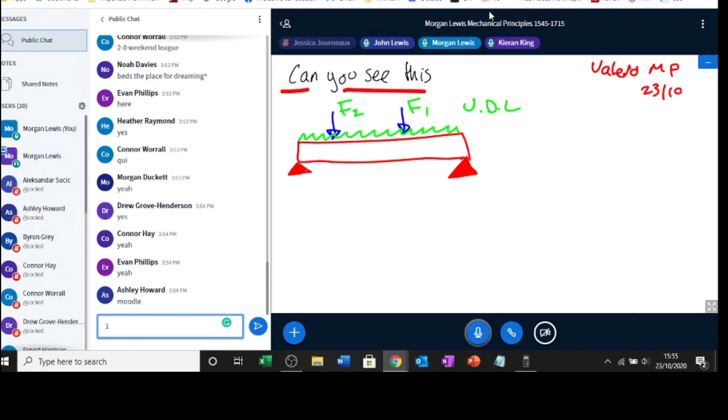Right, in your assignment you should be okay now with doing a beam with forces and UDLs. Does everybody agree with each other? Is everybody happy with the beams? Let me know if you're happy with beams.

Look what colour that is. Look at that lovely colour.

All happy, okay, well done. Heather's happy, anybody else happy with the beams? Because I'm going to move on now, just in case I don't have you next week. But I won't spread that rumour.

Right then, well, I need a pen and paper today. No, you're a volunteer, you volunteered to be here, it's up to you.

Yeah, I would say so. Yes, I would. Obviously I'm recording this video, John, because I worked out how to do it properly now, because I got a few videos where there's no sound. And I'll screenshot as I go along, so I'll make this stuff here now.

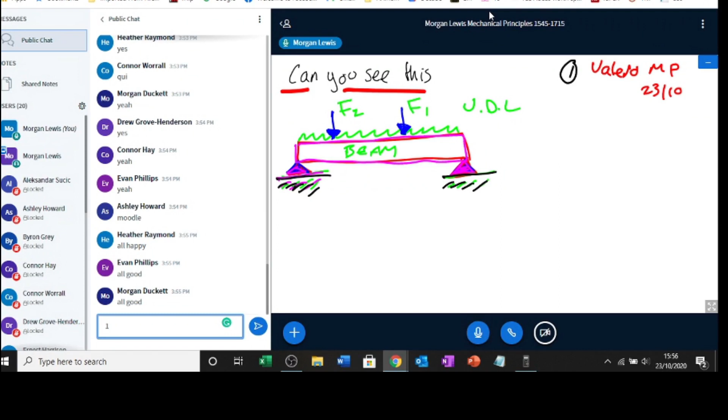But yeah, I would, John. Right, so okay with beams then. Okay with beams. New subject then - no, it's not new to us because we've done a bit in materials already.

If you've got a bit of metal or a bit of plastic or whatever, right, whatever this is, we know it's got an area, right. So this is very similar to mechanical materials - that's my area, that little rectangle. If I now apply a force this way, there's my force.

Right, going that way, what type of force is that called? It begins with T. Tensile, it's in tension, and all that means is being pulled apart. So tensile just means it's in tension, it's being stretched, say, that's all it means. This metal bar, or whatever it is, has been pulled apart, so it's in tension.

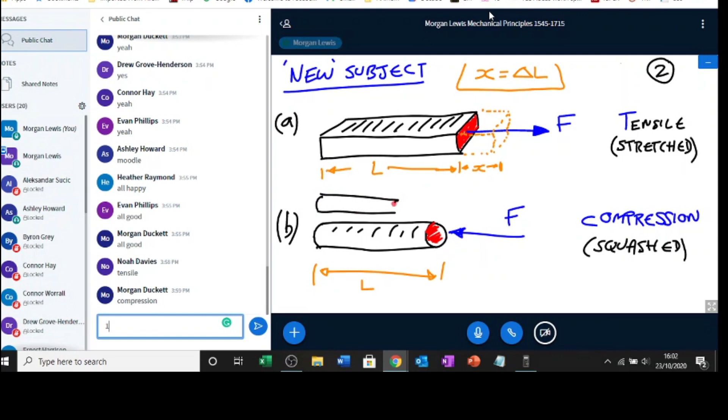Obviously this one with the compression is going to go the other way. So it's getting shorter, it's being squashed. It's like a can crusher, going from that to that, say. So this is my change in length, delta L. I'm just squashing it. Squashing it. One's going one way, compression's going the other.

So a lot of rugby players, they have compression in the neck, they squeeze your neck into your spine, right, compression. One's getting thinner and one's getting fatter. Because if I pull this apart, component A is going to get thinner because it's going longer, it's going to get long and thin. And component B is going to get short and fat because it's been squashed. So the length is coming down, but its diameter is going up because it's got to go out.

So you will find this: tension tends to do this. Tension will tend to make things go from, say, like that. It's being pulled, so it's getting longer, but it's getting thinner. Because the force is going that way, and it's going to get, so it's all the material's going up. So it's getting longer and thinner.

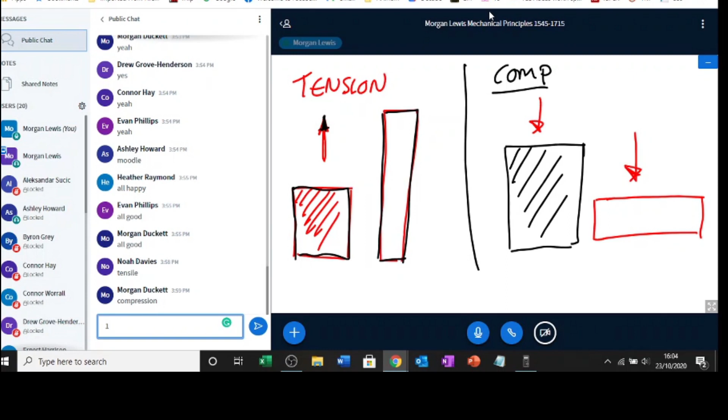And then the other way then is this: so this is compression. Compression, if you have something like that, whatever it is, there's your force. It's going to go like that. Really, the length is going to squash it. It's got to go, it's getting thinner. It's getting smaller but fatter. Tension and compression.

We only worry about for now the change in length in this direction, up or down. Change in length in the Y direction, because this is Y. That's Y and that's X.

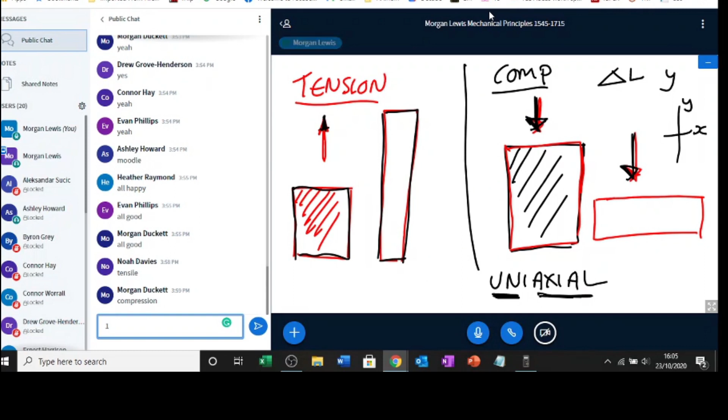So it's uniaxial. Uniaxial, what does the word uniaxial mean? What does the word uni mean? Unicycle - one axial means one axis. So we're going in the Y axis. Obviously, this one's in the X axis. This one is in the Y axis. All it is, just go in - we're not considering the change in length in the other way.

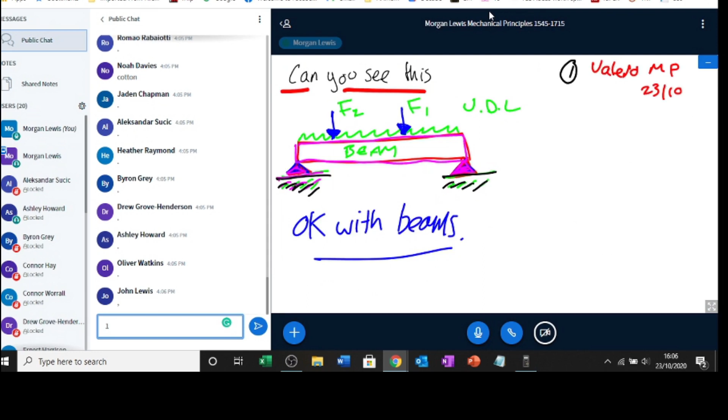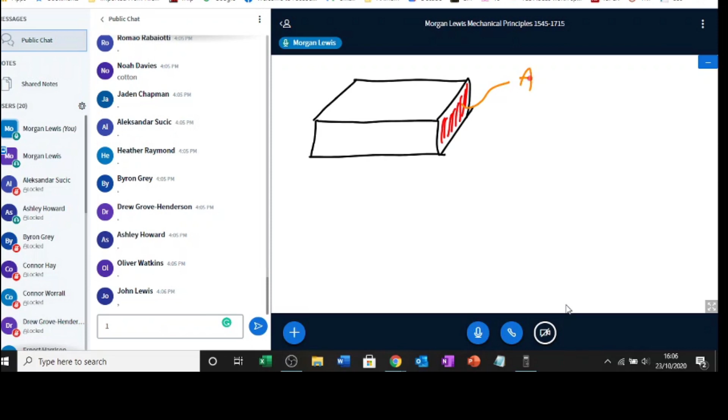Right, obviously when I pull something apart, so when I pull this thing here apart, we'll do tension first - it's the same formula for compression. When I pull this metal block apart, right, there's my area, right, it's always the cross-sectional area. If you cut it in half, that would be the area there, that's the area. Don't do volume, do the area.

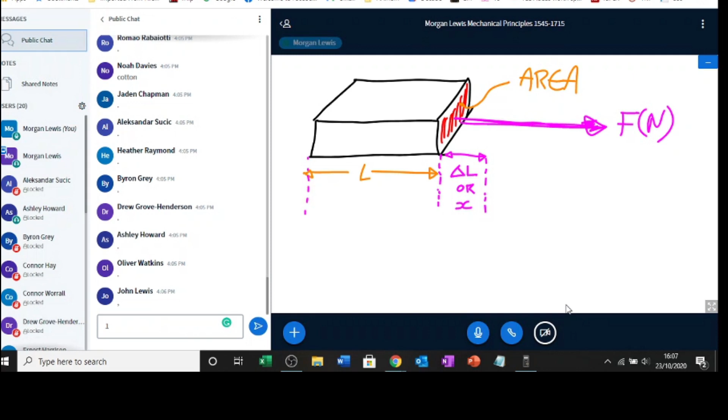And this is length, that's length. So if we've got a force going this way, there's my force in newtons. It's going to make this thing change in length. I'll just draw it like that. Delta L just means change in length, or X, it's up to you, you can call it X if you want to, as long as you know what it is. L is my original length - original. And then this force will tend to make this thing stretch depending on the force and the area and whatever, and the material. It'll make it change in length. In tension, it's going to stretch it.

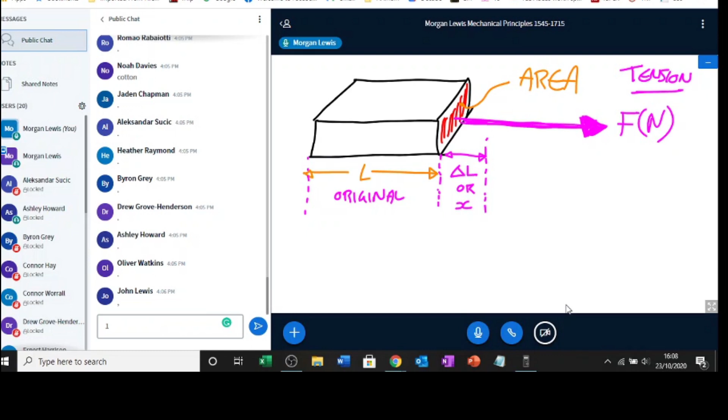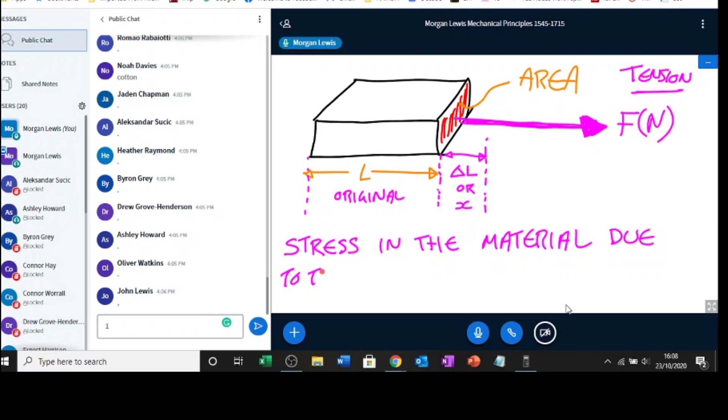So we can work out, like we've done before in materials, the stress in the bar, in the material, just like you feel stress, right? We can work out the stress in the material due to the applied force.

Now you recognise the formula for materials because we've used it to work out yield stress and things like that. But a force will cause a stress, there's my force, it'll cause a stress, which also causes a change in length. And depending on the material, it could snap, could reach the yield point or the breaking point.

But to work out the stress in that bar, or whatever it is, the tensile stress is going to be, because we're in tension now, right? Tensile stress equals, you've seen it before, force over area. If you can write anything down, write that down. Tensile stress is force over area. You've seen that before, in materials, perhaps?

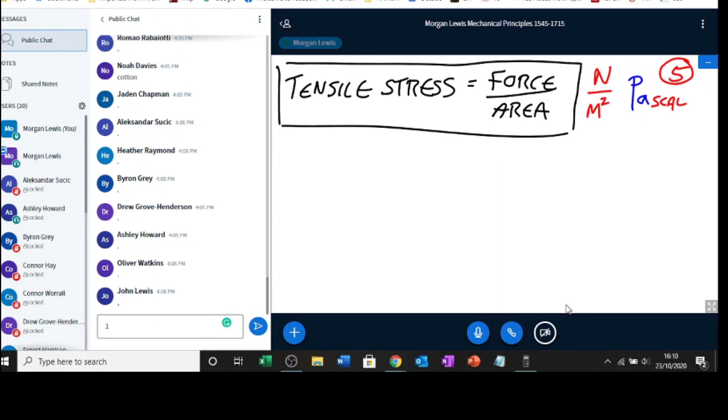Obviously, you have the same thing then for if it's going the other way. We'll also have compressive stress. For now, we'll just consider it to be the same because it's got a different direction in it, really. Compressive stress is still force over area, it's the same formula, it's just a stress. Force over area. That's also measured in newtons per square meter or Pascal.

If you do HNC, obviously tensile stress is going that way and compressive stress is going that way. So we haven't got to do it this way, but in future you may. One is positive and one is negative, one's going to cause extension, one's going to cause compression. So this is the same formula. Uniaxial. It's different if you're going to use 2D, because we're only doing one direction.

Why have you only put PA, not Pascal, on this one? Does this stand for Pascal, yeah? Yeah, PA stands for Pascal. So you can write Pascal if you want to, but just do PA, capital P, small a. Pascal was a mathematician, yeah. You can write Pascal if you want to, John, but most people just write PA.

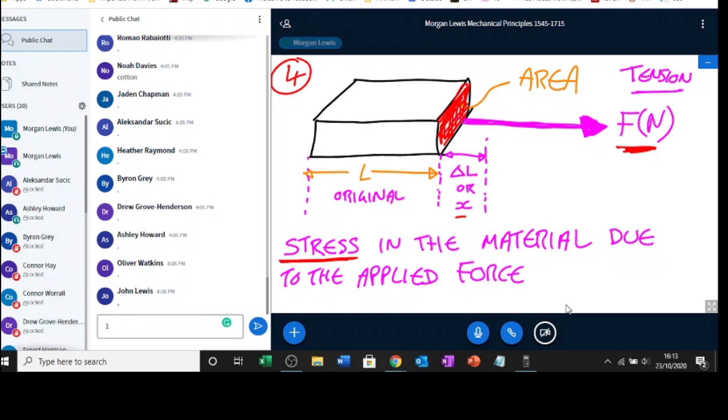And you may have a round bar like this. So there, like we've done previously in materials, it can be pi r squared or pi d squared over 4. Whatever you want to do, right?

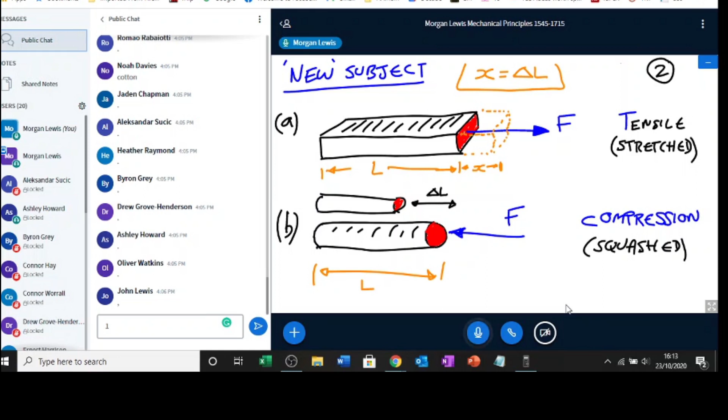Is it possible for you to make a savable? No, what I'm doing, Connor, I don't know why I didn't think about this previously. I got PowerPoint on this, Connor, and things like that, right? But what I'm going to do is now I'm screenshotting this on my Apple as I'm going along, and then I'm going to make it into a PDF and upload it. So can we download it then? Yeah, it'll be on Moodle then, with this video as well. Okay, cool, cheers. So don't say anything like that, because it'll be recorded.

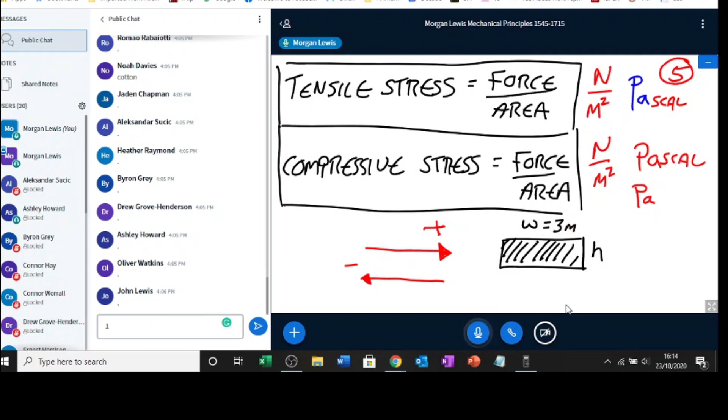If I've got this cross-sectional area like this, so this could be my height and this could be my width, say. So that's that area of that square, that rectangle. You may have these lengths in millimeters, right? But we don't want to be in millimeters, we want to be in meters. So you'll see me convert these. You've got to convert before you do anything else. So 3 millimeters and 2 millimeters, because we're not going to get bits of metal with meters, because that's going to be too big. So you make the dimensions in millimeters.

So obviously, to work the area of that rectangle out, is just going to be 3 times 2. 3 times 2 is 6. Well, that's going to be in square millimeters.

So you've got to convert, you've got to do this. The long way doing it is 3 divided by 1,000 times by 2 divided by 1,000. That's what you've got to do first, right? You've got to convert the lengths into meters. And there's 1,000 millimeters equals 1 meter.

So you divide it by 1,000. Divide the 3 by 1,000, divide the 2 by 1,000. That will give you 6 times 10 to the minus 6.

That's what you'll see me doing in a bit, right? Because make sure you've got to convert things. Don't divide the 6 by 1,000. Don't divide this area by 1,000. You've got to divide the length by 1,000.

Alright, because we've got to be in square meters. That's what we've got to be in, to be in pascals. Now obviously American is going to be inches and square inches and things like that. But just to get used to it, right? I mean, you can quickly do it, but...

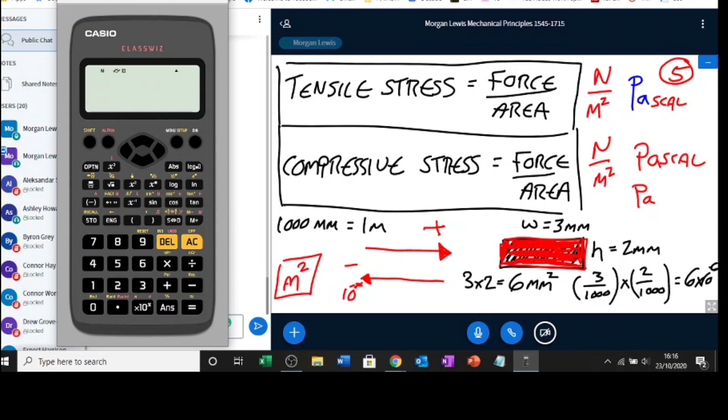On here, look, I'm gonna get this up. There, look. Here, look. Here. There, look. There. Can you all see that? You can't, can you? No, you can't, can you? I'll share my screen. Yeah, let me share my screen.

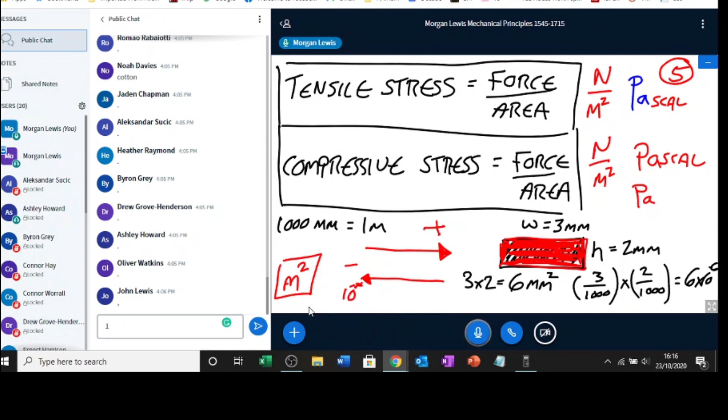There, look. So if I got 3 millimeters, right, just so you know, and I want to make that into a meter, you can do this: 3 divided by 1,000, that gets it into meters. Press equals. Or you can just do this: 3 times 10 to the minus 3.

So that's what I'm doing. I'm converting millimeters into meters. So you'll see that in a bit.

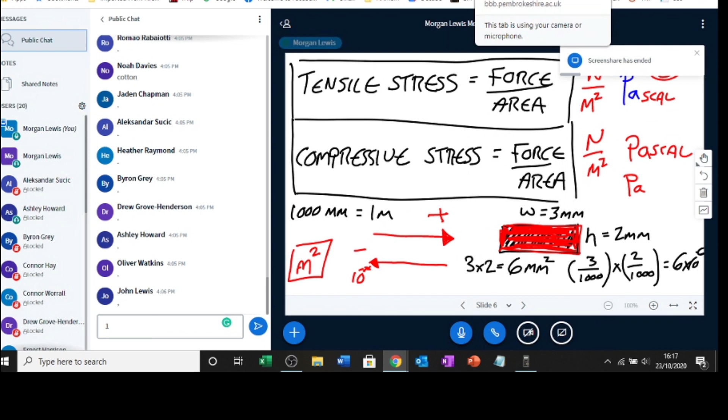Right, I'll give you an example. We'll do an example. Everybody right so far? I'll do an example and then it makes it a bit easy then. Obviously, we're only going to get like squares or rectangles and circles. So all you need to remember really is the area of a circle and the area of a square.

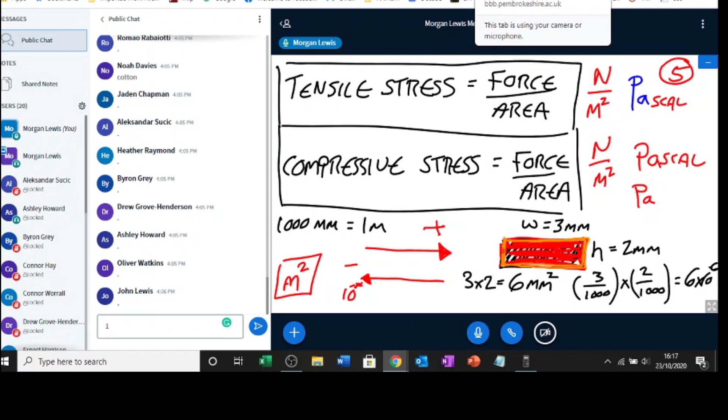Now, what page are we on? Page 6. Page 6. Page 6. Here's my example, right? Here's my round bar. Here's my round bar.

It's got a diameter, right, which means there's my area. It's got a diameter, diameter equals 7 millimeters. Alright, so we can work out the area in a bit. It's being pulled apart by a force.

It's a... environmentally friendly force, that's why it's green. Alright. Somebody give me a number. Somebody give me a number.

8. Alright, so need to calculate in a bit. So 8 kilonewtons is pulling this thing apart. Connor, you can do that one, Connor. You can do yours. Right, it's been pulled apart by 8 kilonewtons. We need to work out what is the stress, the tensile stress in that bar.

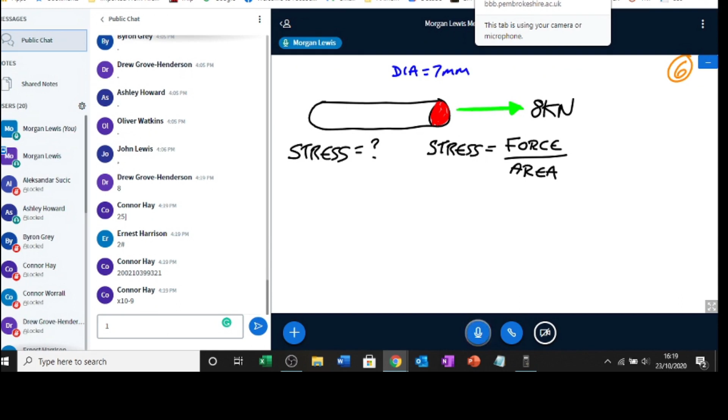So we know the force. The force is, don't forget, now don't do like some people did this morning and put 8. The 8 kilonewtons means it's 8,000 or 8 times 10 to the 3. Because kilo, that's 8,000 really. Or it's 8 times 10 to the 3. Make sure you don't forget the K.

That's our force, easy when you've done it, right? Easy, 8 kilo. The diameter is 7 millimeters. We need to work out now the area.

2 ways you can do area. I prefer this one, pi d squared over 4. Or you could do area is pi r squared. Do it the way you want to do it. I will do it this way because this is the way to do it really. Saves you having to divide that by 2. You may forget.

So don't forget we need to convert this 7. Right, so this 7 now is going to be 7 divided by 1,000 or 7 times 10 to the minus 3 because we've got to be in meters.

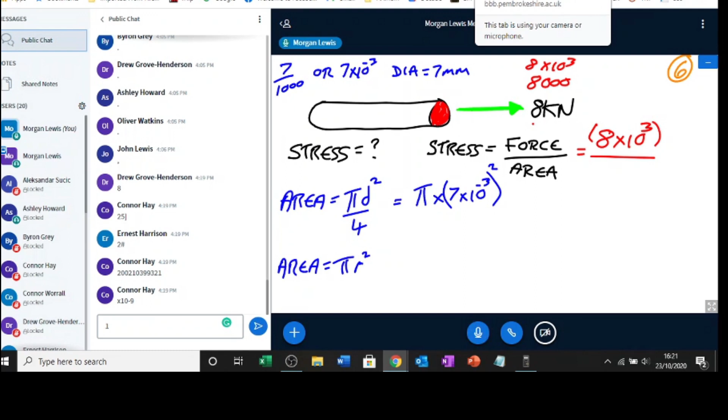So area, I'll get my calculator up in a bit, right? But we'll do this now. We'll do pi times by 7 times 10 to the minus 3. Square it. Right? Don't square both. It's the d squared. All divided by 4.

That'll give you a number. And if you're going to use pi r squared, right, you should get the same answer. Times pi times by half of 7 is 3.5.

Squared. Don't forget the square, people forget squares all the time, right? So it's up to you which way you want to go, you get the same answer either way.

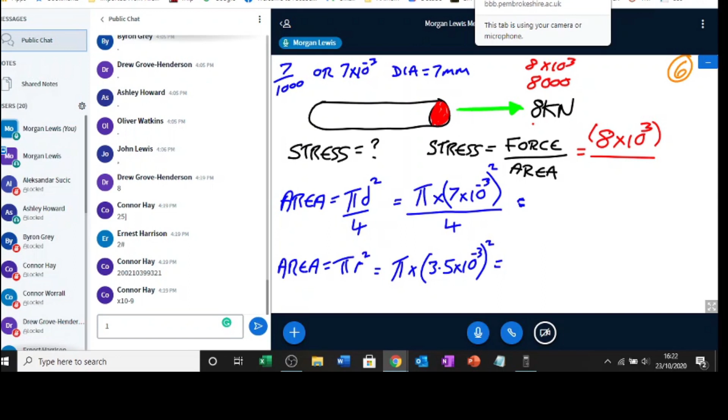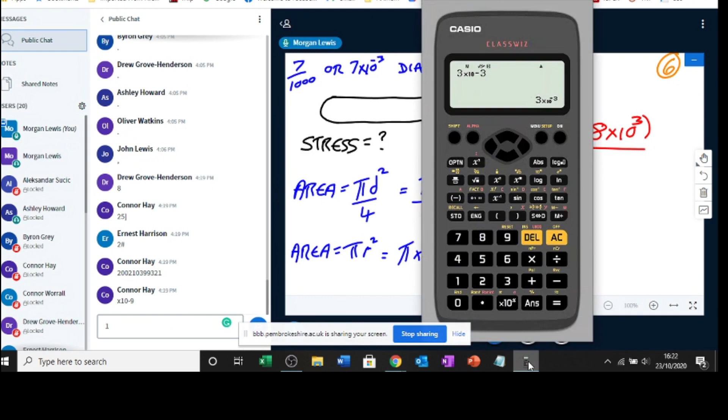I'll share my screen, share my calculator. Oh, I can't remember what it was now. So it was 7, wasn't it? Was it 7? It was 7, wasn't it? So we had 7, so the area is going to be this, right?

So we could do all in one go if we want to. We'll do 7 times 10 to the minus 3, and it was d squared, so we can square it. Equals that, times by pi, shift pi, divided by 4. So that's the area.

38.48. Or you could do pi r squared, it's up to you. So we could do shift, pi times by 3.5 to the minus 3, squared. Pi r squared. You may like it that way, it's up to you. Pi r squared, get the same answer, look.

We don't like minus 5s. Let's put ENG. 38.5, say.

Is everybody okay with areas? You okay, John? Is everybody all right? All right, John? John, are you okay, John? Because I know you were asking earlier on.

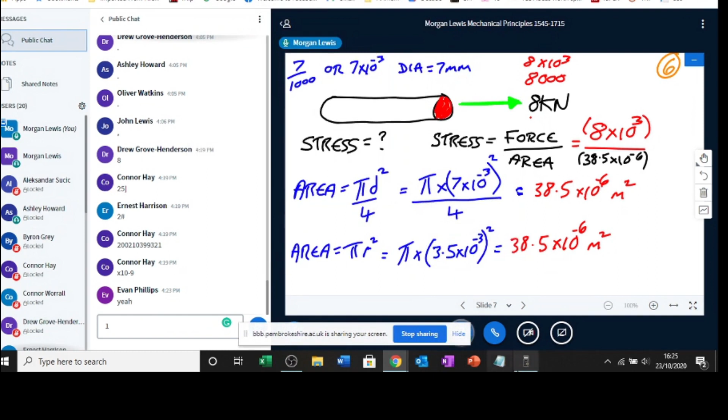Calculator, so it's going to be 8,000 or 8 times 10 to the 3. Oh, let's do this way. Right, 8 times 10 to the 3 or 8,000 divided by the area which I rounded up, 38.5 times 10 to the minus 6. Press equals, it's going to be a big number. That's the answer. You can put all that in if you want to, or you can put in that. 207.8, something like that, 207.8 times 10 to the 6 pascals.

So the answer, let's see if I can get this down here out the way. So the answer equals, down here, look, the answer was 207.8 times 10 to the 6 as a pascal, or because 10 to the 6 is mega, symbol for 10 to the 6 is mega. All right, you can do 207.8 megapascals.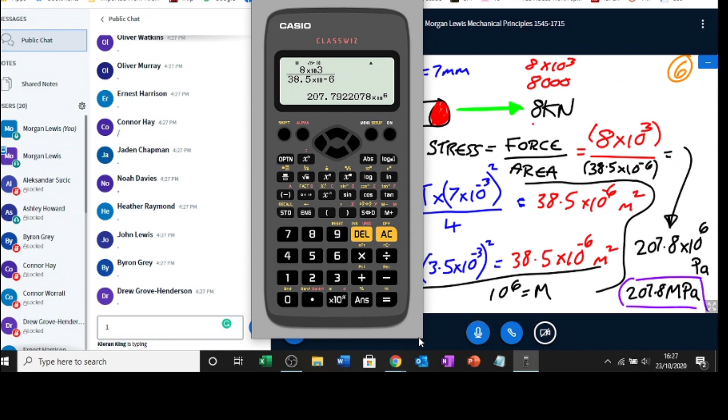Right, so we've got that, right? Let's go 7. So we know whatever this thing here was, it's been pulled apart by a force, and the stress on it is 207.8 times 10 to the 6 pascals. That's the stress, right, on this object. There's my stress.

Right, now that's the stress caused by that force. Now we know that that stress will cause this length to go this way, right? Because it's an induced stress, the length is going to stretch. So we're going to get a change in length.

That triangle L just means delta L is change in length. All right, so same bar, say. So we may start off with, I don't know, let's just say this was 1.5 meter long. So it's a bar, I don't know, and it's 1.5 meters long with that force on it, so it's got 8 kilonewtons on it. The stress on it is 207.8.

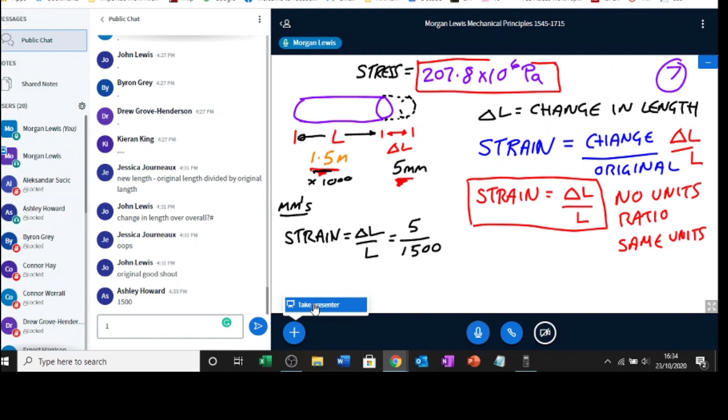So that'll give you the strain, both in millimeters now. So I'll share my screen again just so you can see.

So we did 5 mil divided by 1,500, which gives me 0.003, say. Do it again: 5 millimeters divided by 1,500 - or 5 divided by 1,500 gives me 1 over 300. Or 0.003 will do me. That's the strain, right?

You can do the same in meters, as long as they're both in the same units, it doesn't make a difference. So the strain now in meters is going to be the same formula: change in length over original length. So we've got 5 millimeters, and that's the same as 5 times 10 to the minus 3 meters - just doing 5 divided by 1,000. Divided by 1.5, because we can do it now in meters. This way is both in meters, just to show you can do it either way.

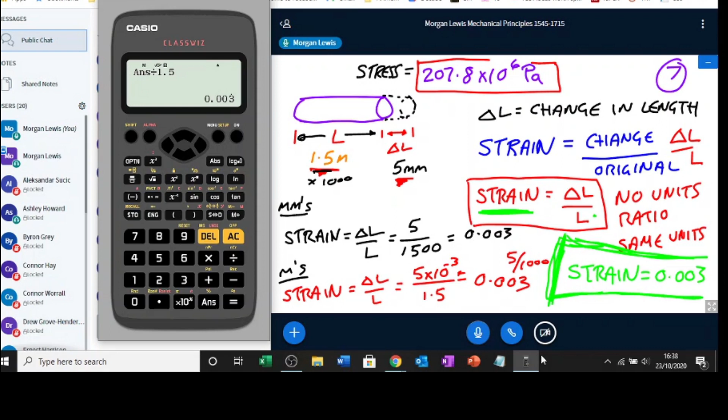So that's stress and that's strain. Everybody all right? Is everybody all right? Am I going too slow?

Right, we've done stress, we've done strain. 7, 8. Right, we've done stress. We've done strain.

Stress is force over area. Force over area. Strain is change in length over original length. Oh, that's in pascals there, right? Pascals, no units.

That's not noun its, right? It doesn't say noun its, it says no units.

Can anybody tell me the last thing I'm going to work out? I know stress and I know strain, and we've worked it out in materials. What's the last thing I'm going to work out? We haven't gone to ductility because we don't need it. We know stress and strain, so we can work out another property of this material using that. We haven't got ductility, no. We've got stress and we've got strain. We need to know the elasticity of this material, so we're going to use Young's modulus.

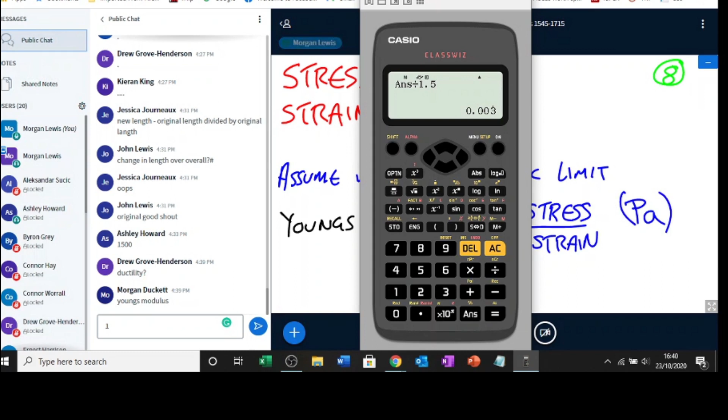All right, and now we can work it out because we've just worked out the stress on the previous slide and we've worked out the strain on the previous slide. So we can just divide them together now. We know that E is going to be stress over strain. What's my stress? I need to go here. There's my stress there, look - 207.8 million.

207.8 to the 6, so 207.8 times 10 to the 6. It's my stress I'm looking at, and there's my stress here. We worked it out, 207.8. And then the last one to work out is strain, which we just did. There's my strain, 0.003. So we divide all of that by 0.003. Whack that in your calculator and you should get a number.

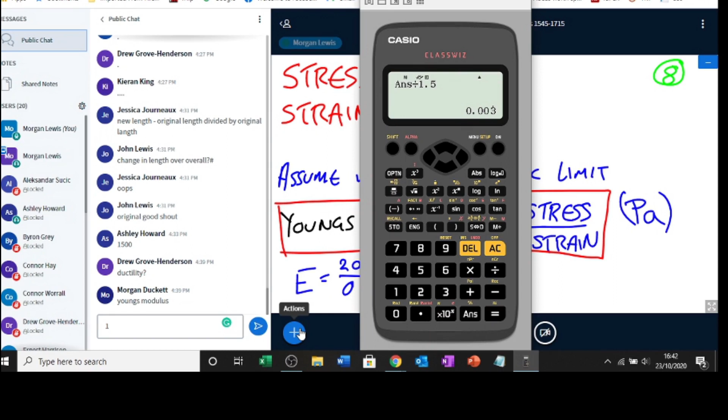So I'll share my screen just so we can see it. Let me write it down: 207.8 divided by 0.003. Obviously, if you did the strain calculation underneath it, it's a bit more accurate, isn't it? But I'll just use my rounded up number. So we'll take presenter, I'll share my screen.

So it was 207. Let's go over here. You can do this, just do that. And do 207.8 times 10 to the 6. That's my stress... divided by my strain - 207.8 times 10 to the 6 was my stress, divided by my strain, which is this small number here, which we worked out. It's a big number divided by a very, very, very small number. So we should get a big number, which we do.

All right, we like it in threes, so press ENG. So it's 69 giga, because 10 to the 9 is giga, Pascal. So it's 69.26 gigapascals, right? So it's the stress over the strain.

You could also go this way. You could do 207 - you haven't got to do it that way, same way. 207, 6 equals that. Divide that by 0.003 equals that. There we are. Press that. Thank you very much. Stop sharing.

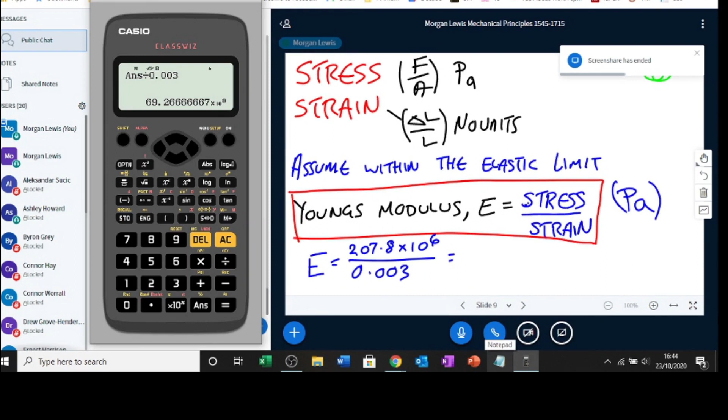So the answer for Young's modulus of this material, whatever the material is, was 69.26 times 10 to the 9 pascals. It's the same as 69.26 gigapascals. Tick. Da iawn - that means very good, Ashley, just in case you don't know what that is.

Is everybody okay with stress, strain, and Young's modulus? Sort of. Did you follow on? Did you follow through? Well, if you didn't follow through, but you know what I'm saying.

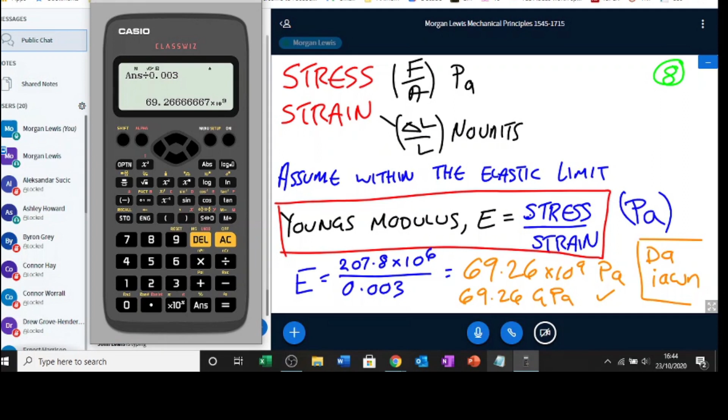Why aren't I getting things? Can somebody just comment? Normally I get a bell that lets me know. Oh, stop doing it, it's a bit odd. Normally I get like a bell, I get loads of bells now as you're doing that, but I don't get it now. Perhaps they've stopped it. Oh, there we are. Oh, it's not working. Right, stop typing then. Oh no, like I say, it normally gives me a little bell.

Right, here's an example for you to do then.

Now, it's the same way if it was compressive, so don't worry about that. Yeah, no, yeah, I have. I have them always down as pop-up alerts for chat, audio alerts for chat. It's on, but perhaps it's just, I don't know if it's about me. Sometimes I like to know when people are asking me stuff.

Is your computer muted? No, it's not muted. John, say something, John, because you normally say something. Say something to me. Hey! No, it's not muted at all.

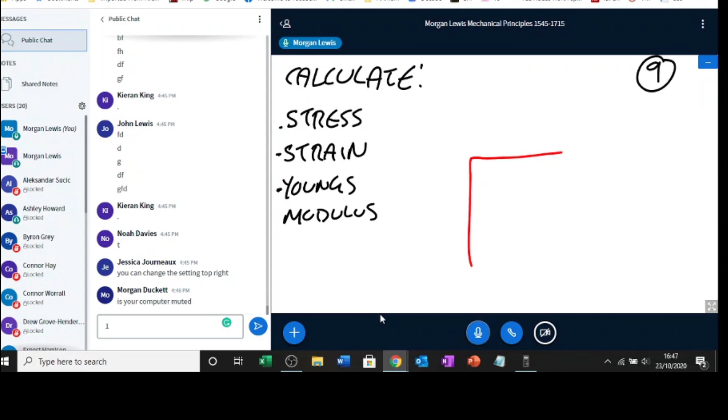Here's my bar. Now it makes no difference if it's going up or down, it's the same thing. Here's my square bar. Make sure these lines are like 30 degrees, get it oblique please, or isometric. That's my metal bar, or whatever it is.

It's got dimensions, right. So it's got 20 millimeters here, and this is also 20 millimeters. So it's 20 millimeters here and 20 millimeters there, because it's a square bar now, right. You need to find the area in a bit. Area of a square, so breadth times by depth, say, or width. Let's call it depth, I suppose. It's 20 by 20, right. But don't forget you need 20 to be in meters. It's a square bar.

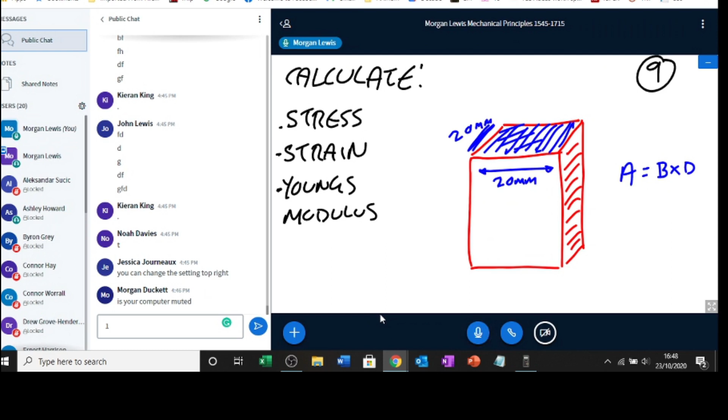It's got a force on it, a tensile force pulling it here. Someone give me a number. 30 kilonewtons. Being pulled up 30 kilonewtons, right. This thing is a 20 by 20 square, and its length.

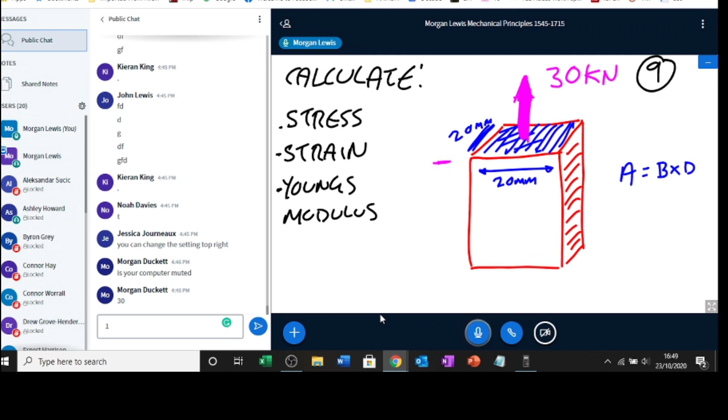Somebody give me a length. Obviously this is not to scale now, this drawing, right, somebody give me a length. 10. 10 what, John? 10 millimeters. No, don't do 10 millimeters, it's 10 meters.

Not to scale, right. So I'm going to get some squash because my voice is going. B and D stands for? B stands for, the what? And the A equals B and D. What does the B and the D stand for? Breadth and depth, like there, like breadth and depth of a square. So, or width and depth, it's up to how you call it. It's just 20 by 20, it's a square, that's all.

Because this can be the height in it. So all I'm trying to get at, John, is this: the area now is going to be, right, it's going to be 20. But you've got to divide both of these by 1,000 now, because you've got to get them to meters. That's to make sure. Right, you can do 20 by 20 and then divide it by 1,000,000. That's one way of doing it, but don't divide the area by 1,000. You can't just work out the area in square millimeters and divide it by 1,000 because it's 1,000 by 1,000. So just for now, you've got to divide the lengths by 1,000 first, then do that.

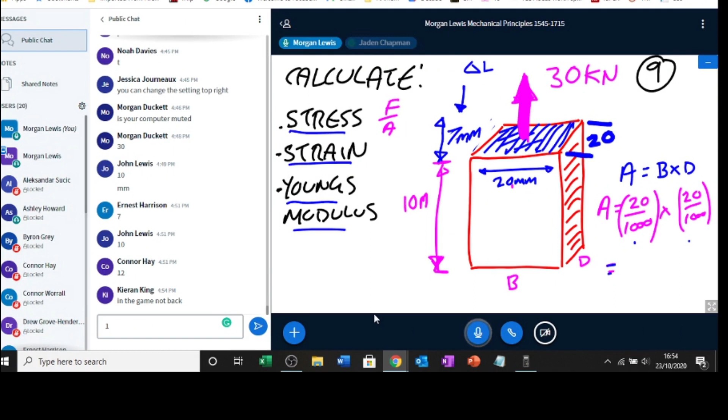The area, that's this here. Look, can you see? It's that cross-sectional area there, so it's the area of that square. It's just 20 divided by 1,000 times 20. You've got to get into meters, right? So it's 20 divided by 1,000 squared, basically. So the area is 400 times 10 to the minus 6.

Correct, yes. Alright, cheers. All you've got to do really is 20 by 20, and then times that by 10 to the minus 6, because you're timesing 1,000 by 1,000. Yeah, but it's that square there. That's what it is, Jaden. Right, that's what it is.

Has everybody got that? Can I change this now, this slide, so I can slowly work it through for you? Well, I'll work it out now.

So, stress. Yeah, can you go through it again more? Because I'm not really sure on this. Come on, no problem, I haven't got Scooby here.

Right, here we go, ready? So there's my bar, right? It's been pulled by 30 kilonewtons. Right, so it's a square bar, just a square bar. It's 10 meters long. It's been pulled by a force, whatever that is - 30 kilonewtons. It's a square bar, so it's 20 by 20.

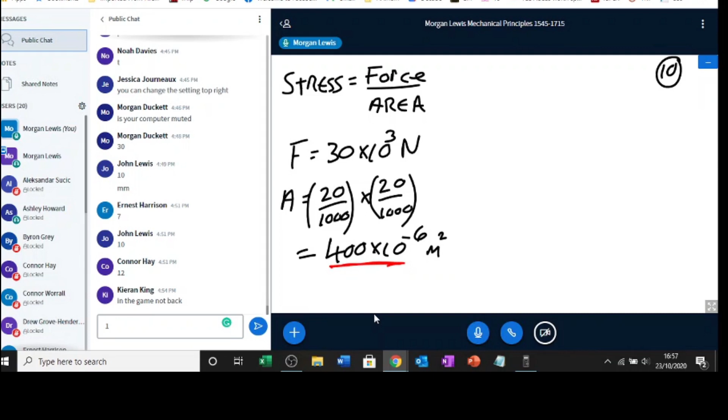What you can do is just multiply the millimeters together and add that on the end. But just for now, keep converting it from the start. That gives me my area, which now I can put here, because my force is 30 over my area, which is 400 times 10 to the minus 6.

It's going to be big numbers. Don't forget it's going to be a big number, because it's a big number divided by a small number. So in your calculator, do 30 times 10 to the 3, or 30,000, divide by 400 times 10 to the minus 6. Press equals - it's a big, big number, 75 mega.

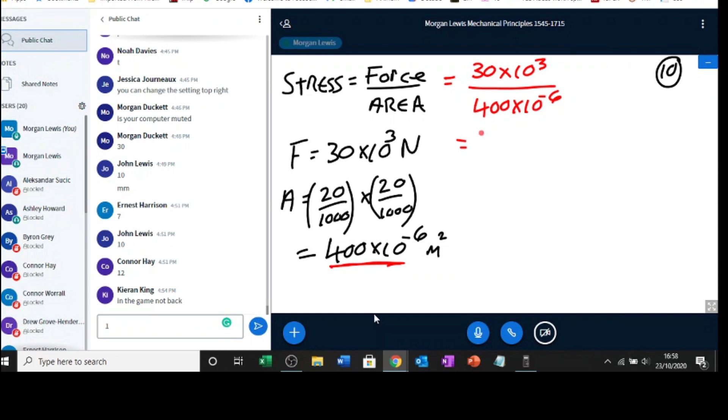75 megapascals, or - don't write all of this in because you may forget a nought. Do we all get 75 million? Right, Connor Hay?

Yeah, cheers, that's my stress. That's the stress, alright.

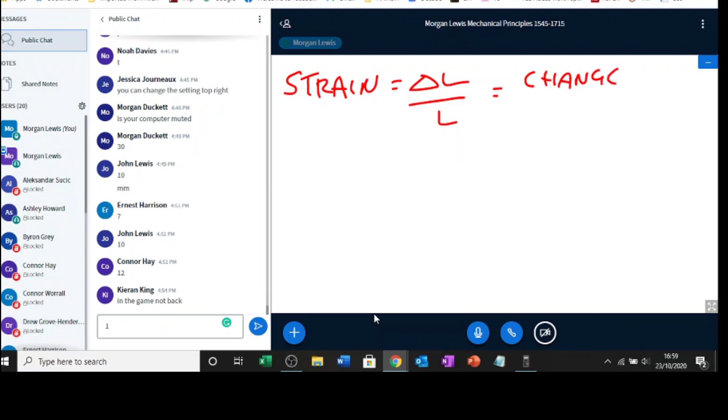Done that, tick. Strain now is going to be, as before, strain is change in length over original. So it's change divided by original.

Alright, now we've got to be - so it's got to be in either meters or millimeters. Doesn't matter what it is with this, but as long as you're consistent. If you're going to pick meters, both lengths have got to be in meters. If you're going to be in millimeters, both lengths have got to be in millimeters.

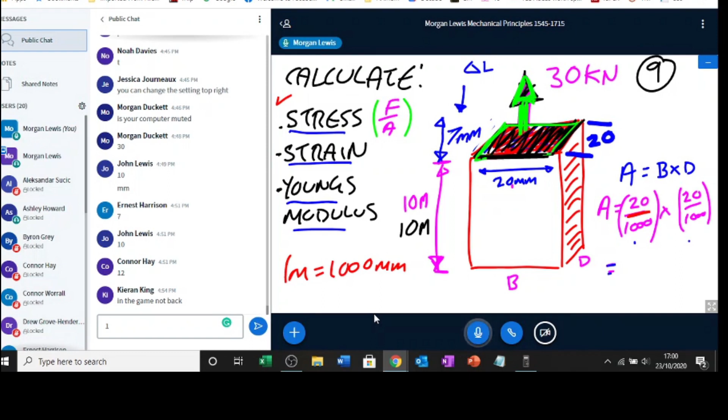Alright, so I'm going to stick with millimeters because I got 7 millimeters. And I got 10 meters, which is going to be 10,000, because 1 meter equals 1,000 millimeters. I've got 10 of them, so it's 10,000. So for strain, the change in length was 7 millimeters, and the length was 10 meters, which equals 10,000, because this is 10 times 1,000, which gives you 10,000.

So you're going to divide that now by that. All right, we've got 10,000 now, because I'm going into millimeters, not meters. So my strain is going to be change in length over original length. My change in length is 7 millimeters. My original length is 10,000 millimeters. We made these numbers up now, because I'm in millimeters. 7 millimeters over 10,000 millimeters because it's 10 meters long.

So do 7 divided by 10,000. Stupid number, really, isn't it? Not much of a change, is that? So you should get this for your strain: 700 times 10 to the minus 6. Your calculator, if you press ENG, it'll put it in that format - micro, micrometers. Well, there's no units, but it's micro strain.

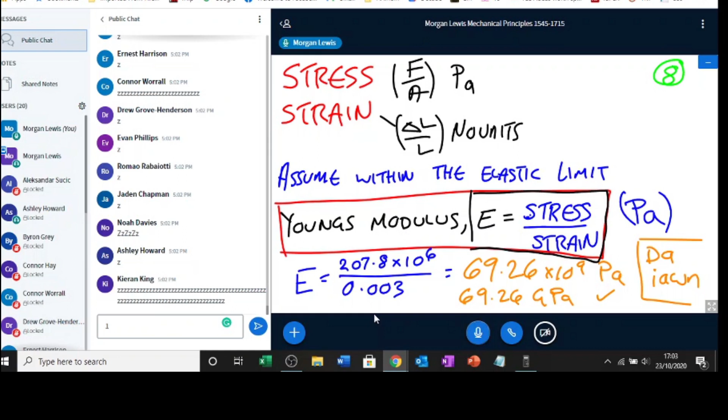And the last thing we've got to do, now that strain is done, is Young's modulus, which is stress over strain, back here somewhere. Look, no tricks in this. Stress over the strain - we've got the stress, we've got the strain, so there's no more working out to do. We've just got to use the numbers and hope they're right. So the last thing to do was Young's modulus. Modulus equals stress over strain.

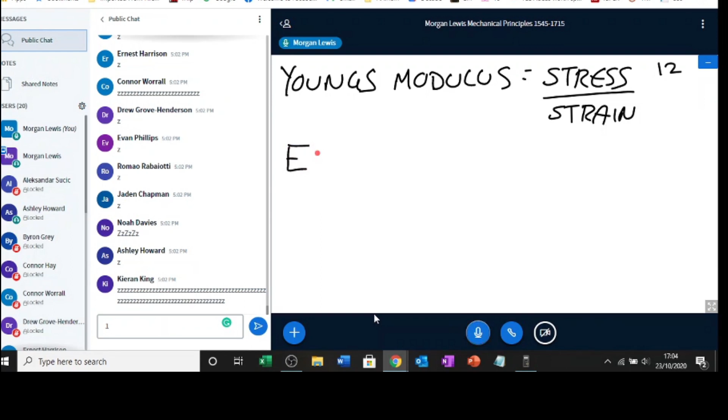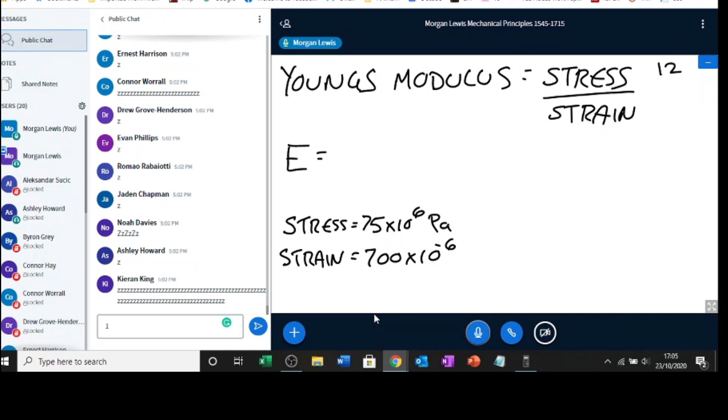E is a symbol for Young's modulus. And the stress we've got is here, 75 megapascals. So my stress is 75 mega, 75 times 10 to the 6. And my strain, which we just worked out, is here, very, very small, 700 times 10 to the minus 6. So it's going to be a big number, this is. The higher the number, the less stretchy it is. This thing is 10 meters long, it's only stretched 7. So Young's modulus, stress over strain - we know the stress is 75 times 10 to the 6, all over the strain, which is 700 times 10 to the minus 6.

Now, some of them may cancel out, you might see that - still stick it in though. So 75, we'll make a big number now, 700 to the minus 6 gives you a very big number. You should get what you get. Somebody tell me, see if I'm right.

You should get 107. If you cancel it, don't cancel them on, because you'll have to add it back on again - keep that in. 107.14 times 10 to the 9, which is the same as 107.14 gigapascals. The higher the number, the less stretchy this thing is, or the stiffer it is. 75 divided by 700 - make sure you put in them and them.

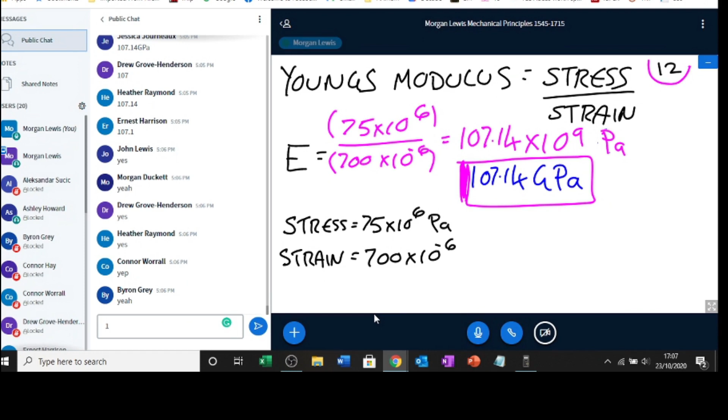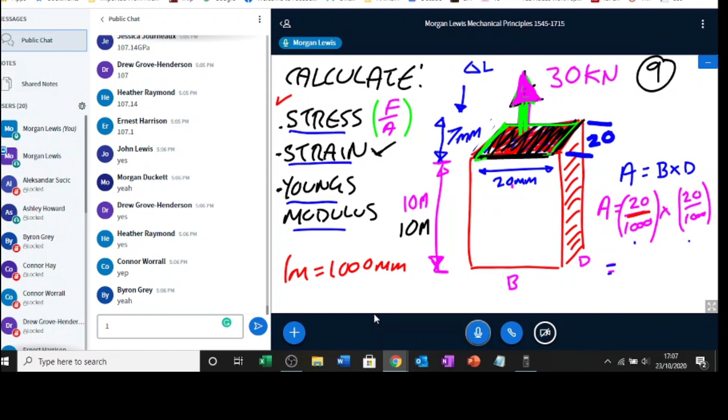Alright, that's all we've got to do. Now, just one last thing - it's the same formula, really, for if it was compressive, but with tension, it's going in one direction. So this stress would be going up, and you would have a compressive stress going the other way. Obviously it's not as easy because some materials behave differently in compression, but assuming everything was the same, you'd have the same thing, but it's going the other way, and it's 75 going up. But don't worry about that for now. Is everybody okay with working out stress, strain, and Young's modulus?